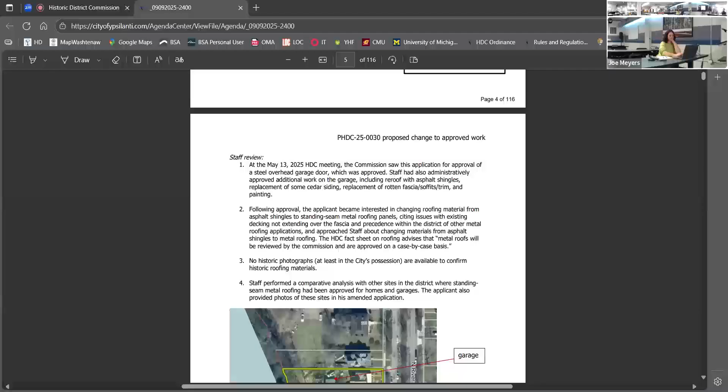There are three other sites in the district that the applicant had brought to my attention. So I did go to those sites and also looked at the records for past approvals, communications, and minutes packets, seeing what the commission and staff had been looking at before in their approvals. There seems to be a variety of factors here. One is that the garage at 217 North River is situated behind the house so that you can't see it - it is out of view from the public right of way.

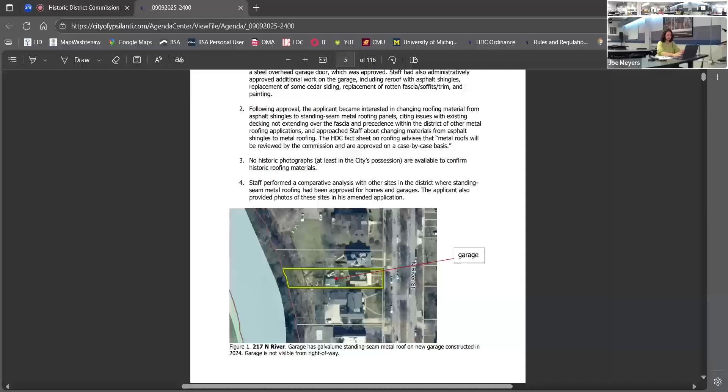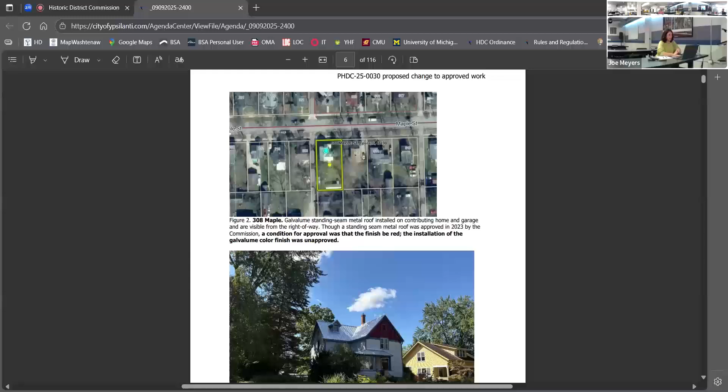The next one is 308 Maple, and that is the home where the entire house and the garage were both approved for standing seam metal roof. However, a condition was that the roof would be red in color, and what was installed was actually not red. So I think that's an important note.

Specifically because the literature shows it is a historically appropriate product in some instances, however color is a factor in what could be considered appropriate, perhaps more than other roofing materials, because of its reflective quality and how it takes up more visual space or calls more attention depending on what color you install. So where typically the commission would not oversee color, this might be one instance where it does actually impact the visual quality once it's installed. In my experience walking the street, you can't really see it in the photo, but it was glaring - and I could be wrong, but I think a darker, more toned down color might have changed that. That was what caught my eye going down that street.

Now, I understand the garage placement - it's a front gable configuration and set back, so it's not going to be glaring or very obvious from the right of way. However, the real question is, both the home and garage are visible and contributing, according to the recent resurvey.

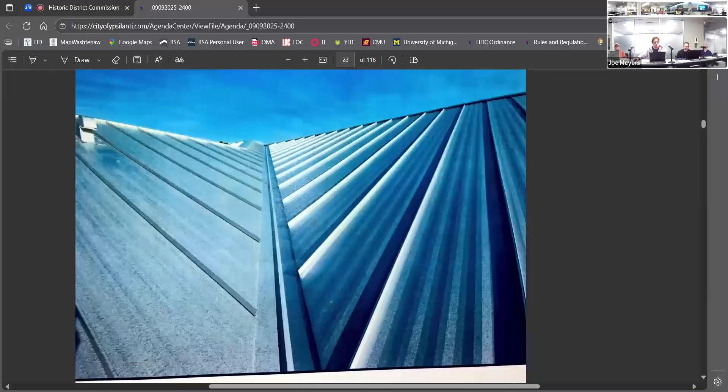It's a zinc coated steel. Sorry, I've specified the product. It's zinc coated steel. The color is a result of the processing materials. What you're looking at, Stefan, are painted products. But in any case, all of them come with a certain degree of gloss to them, because we don't make flat steel roofs or flat aluminum roofs, flat as in paint finish. You can't buy them, as far as I know.

Okay, but the manufacturers of this product offer it in this galvalume finish as well as an array of colors, do they not? I'm not certain, but if you're looking at the website, I know they have some other colors, I just didn't research beyond this one.

I do remember the application for the house, the other house on Maple, and I don't remember that it was particularly contentious in terms of the metal roof, the standing seam metal roof. I do remember that the commission did discuss the color because it's this big uninterrupted area that's highly visible. But that brings me to where my discomfort comes in, saying, well, it will match the house across the street. The problem is the house across the street was not approved for that color. It's, in a word, illegal.

Well, I think the one across the street, for the garage, was approved for the galvalume. That wasn't the red. I think it's the one down the street more that was supposed to be the red. But that's what I was saying, maybe not that house, but one of the houses that's sort of cited as precedent really has no precedential value because that's not what was approved. What was it, which one is that? Is it 308 Maple, is that one? Because that was the whole roof.

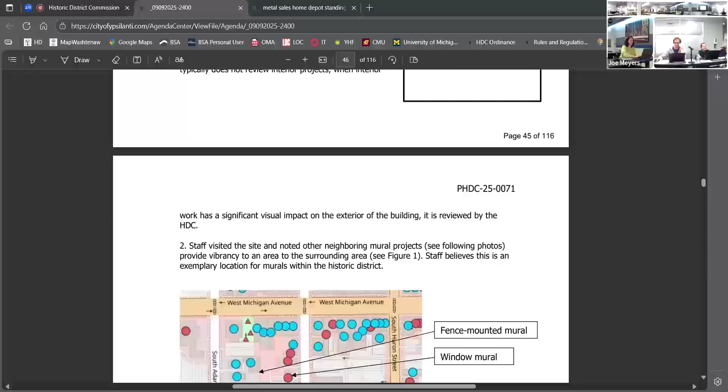It's an area that, in staff's opinion, is a kind of pocket within the district that doesn't have a lot of contributing structures around it, but there is seasonally a lot of activity. My recommendation is that the murals do not have any negative effect on contributing structures, as they are - here, you can see the location. The red are non-contributing structures, and then the blue around it are contributing structures.

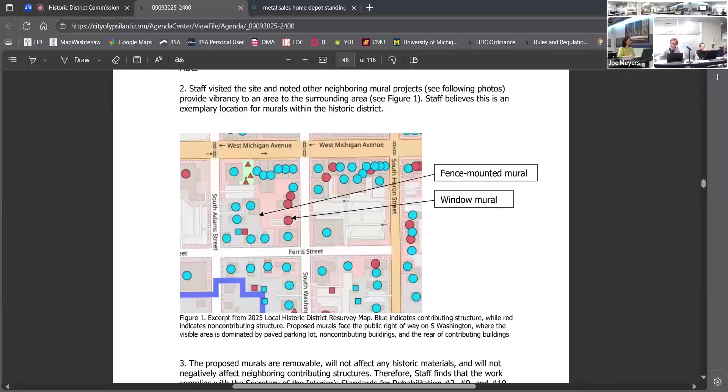But like I said before, the murals would be facing South Washington, and in staff's opinion, adding vibrancy to that area of the district, and not negatively impacting anything contributing. So my recommendation would be to approve the application as presented. Okay, thank you. I don't have anything particular to add here. Commissioner, thoughts, comments, motion?

I agree 100% with staff's view, especially since it's removable. It's not going to damage anything.

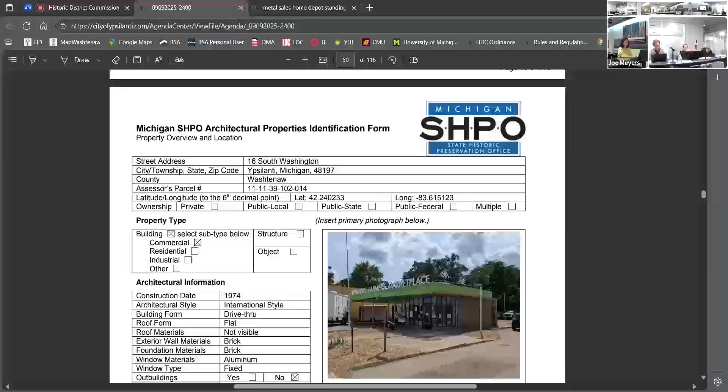I would be prepared to make a motion. I therefore move to approve application PHDC-25-0071 and issue a certificate of appropriateness for hand-painted window and fence-mounted murals at 16 South Washington as described in the application. The proposed work meets the Secretary of the Interior standards for rehabilitation. Number 2, do not destroy original character. Do not remove or alter historic materials or features. Number 9, contemporary design shall be compatible and shall not destroy significant original material. And number 10, new work shall be removable.

So moved. Second. Can I ask for discussion? You may.

I agree with everything that's been said in terms of it being removable and all of those things, except that in this particular case, the specifics of the artwork include the company running the place's logo. And I think that transforms it from a work of art to a sign. I don't want, as one commissioner, to set a precedent for the Bank of Ann Arbor to be, quote, making art with their logo embedded in it and painting it on the sides of buildings. So I can't support the actual graphic.

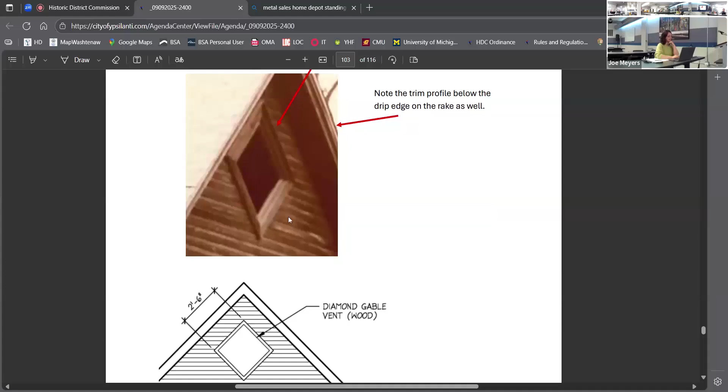It didn't seem to staff that the historical photographs that we have available, and the project team has available, were reflected in the provided drawings. For example, the dimensions, profile of trim, the materials in general, but also justifications for why things are designed the way they are.

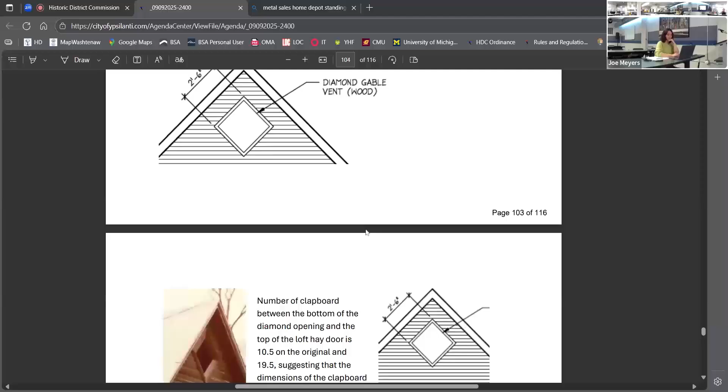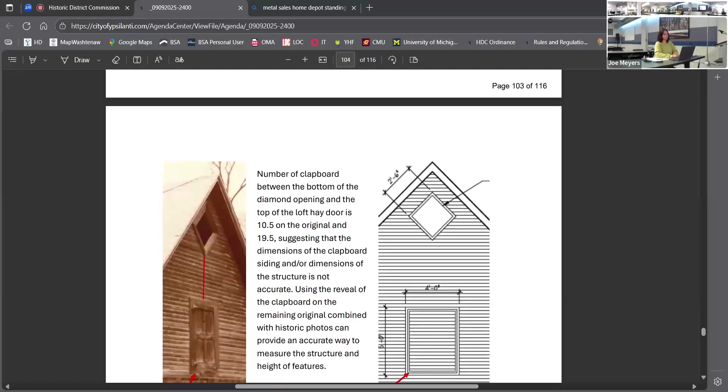There are some remaining materials on the site that, per the standards, will need to be reused in the reconstruction of the carriage house where possible. For example, the clapboard siding that remains will need to be matched in profile, and there's some differences in height, and it's not quite clear what's being proposed for openings.

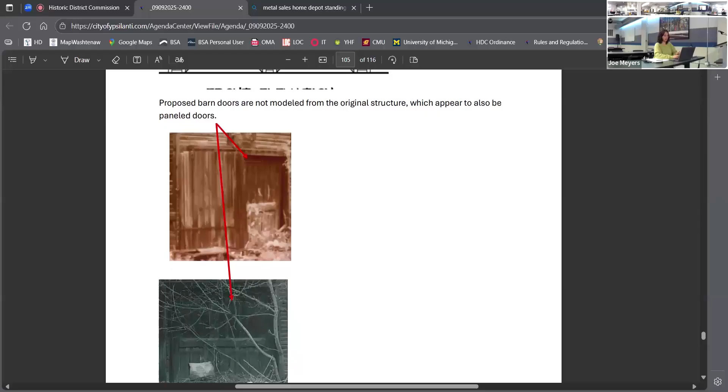So my recommendation was that for the October meeting, before that application deadline comes around, the application materials are reworked and staff is consulted to work through some of those things before the final submittal, just to hopefully have something complete and approvable by the commission.

But I definitely welcome all of your feedback on both my comments and, of course, the materials that were turned in. So if that's all I have, I don't know if Kareem has anything.

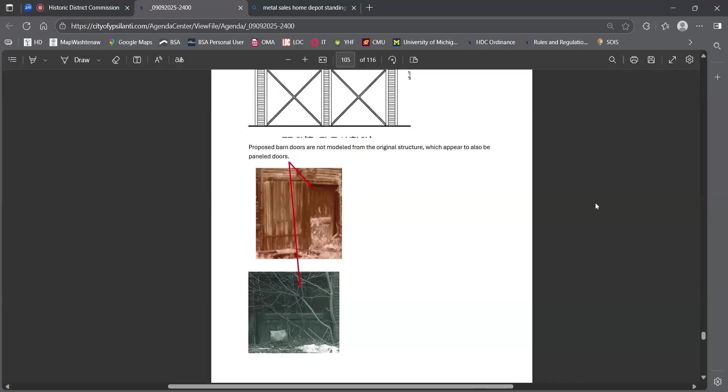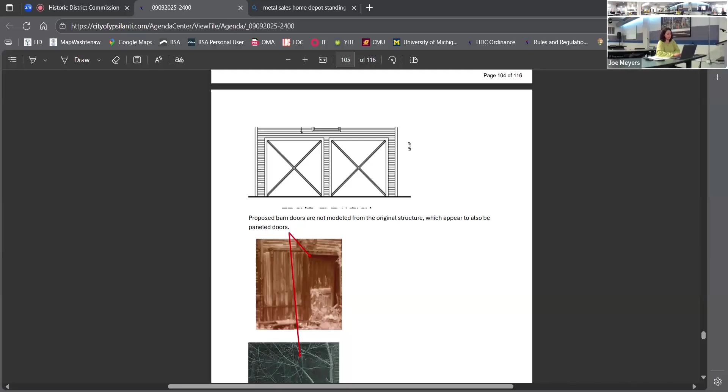So, well, first off, good evening, hello everyone. Is William in the group with us today? I'm not sure if he joined. He said he was planning on joining us. No, he did call me beforehand and said he was not going to be able to join. Oh, even better.

Okay, so right now we are going through a few things with William. We do have a material list, I believe, but we're going a little bit back and forth with him because the pricing just doesn't make sense. It's nearly coming out to six figures for a barn style garage, and we didn't receive a pricing breakdown or anything like that.

So we're going back and forth because some of the materials that were proposed in his application weren't really needed, thus increasing the cost for us. Just as a side note, obviously we want to erect the building to how it was and bring it back to an exceptional standard, but with a lot of things going on, it doesn't make sense for it to be about $83,000 for what he's proposing.

So we're going back and forth right now with him, trying to get a better understanding of what we can do, and what was proposed with him, and what really would just be acceptable with the commission. But that's where we stand as of right now. We're nearly there, but right now we're just talking about material costs.

The materials in the packet, Carrie, you mentioned the submittal of additional materials. Is that included, or is that not in the packet? So the only information I have on materials is included right here. It was what was included on the application itself. And like I mentioned, there's a lot of discrepancy in options.

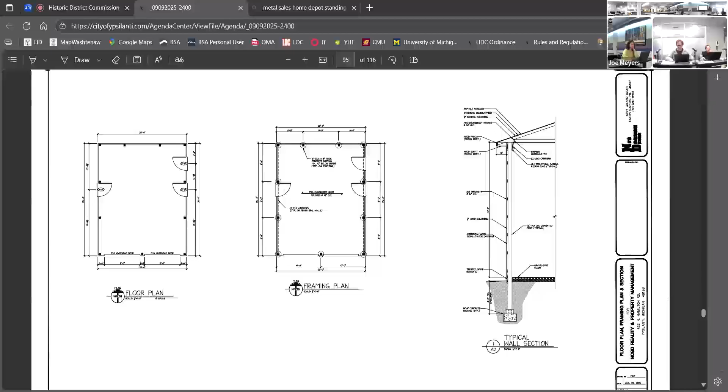Right, okay, so it's not exactly clear yet what's being proposed. Yeah, this is all in a very much, like, if this was slated to be an action item tonight, there's no way this is nowhere near ready for that kind of thing, and I think Kareem knows that. I was trying to pin down those details in advance, but there's a lot more specifics, there's no rush to get to.

I understand the reason to keep things moving along, but to rush to an application where we have to either approve or not approve it, there's no sense doing that until all these details are straightened out. Even material choices, as you said, you're going back and forth on. That would all need to be ironed out before you make an application. Correct.

There's a lot of details here, still a lot of question marks, and I don't know if commissioners feel like they have enough to comment on, or perhaps see something heading in a certain direction and would like to ask a question, or head it off, or encourage something. At this point, I don't know if commissioners see that kind of potential, but I'll open it up to commissioner comment.

Could start as a discussion point, maybe some of the things that Carrie had pointed out in her evaluation. It could be helpful to comment on those. Again, looking for feedback to give to the applicant, to take back to the builder as well, to help focus and narrow down some of these things.

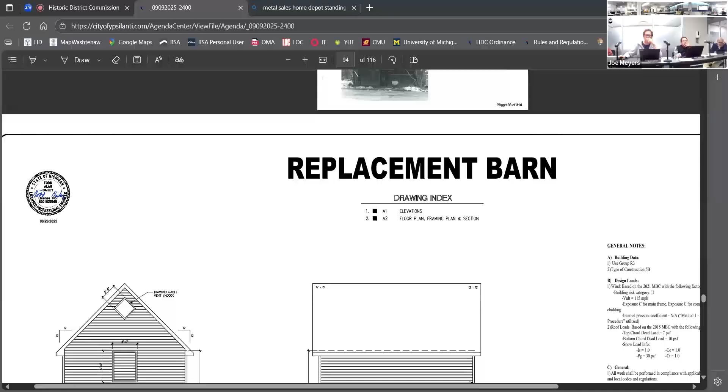The original structure had a second story. Is that being included? With the door above the garage doors accessing the attic area, the second level?

Are you asking the applicant? I'm just wondering, it's not in the plans. Yeah, see, this is why I was requesting William to be a part of this meeting today. I know he's been communicating with you guys on the side, maybe Carrie, but with us he just, last second — sorry guys, I'm accompanied by my partner today, Hiba, by the way.

But Hiba, when did he send it to us? By like Friday, randomly, he sent us the cost, just the whole breakdown. Yeah, he sent us an invoice with no full breakdown of all the materials, everything he was charging us for on Friday. Didn't respond Saturday and Sunday because he's off, and then it was just kind of in the air Monday and Tuesday today.

Yeah, so we've been getting other opinions from other builders, and 10 out of 10 have said it's an outrageous price point. And I guess there was an approved drawing that we were good to go on, but the builder was kind of throwing in some things that weren't really part of it, to say the least. So that's where we're at.

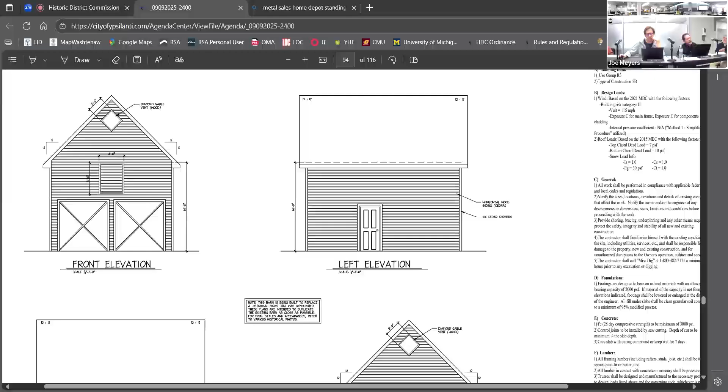Have you seen any of the feedback Carrie provided that's in the packet for this meeting tonight? Yeah, we've been looking at it. We would glance at it, but William would tell us to just let him handle it, so we've been letting him do so. But this past Thursday, Friday, whatever it was, that's what kind of took us by surprise.

Stefan, to possibly answer your question, if you look at drawing 1 on A2, the section through the wall does not include a second story, so I would say they're not proposing a second story. But what they are proposing are 3 doors on the outside that are not, quote, overhead doors. I don't understand why they're there, and it's certainly not the look that it had before.

And it kind of makes it look like it's going to be operated as a duplex, which might be the wrong message. So yes, I'm glad you mentioned that, because it's looking like it's going to be operated as a duplex according to what we're hearing and the materials and whatnot. We just want to bring it back up to a standard historical barn-looking garage, barn style I should say. But that's why it's drawing up some confusion on our end, because it just didn't seem like that was the correct proposal.

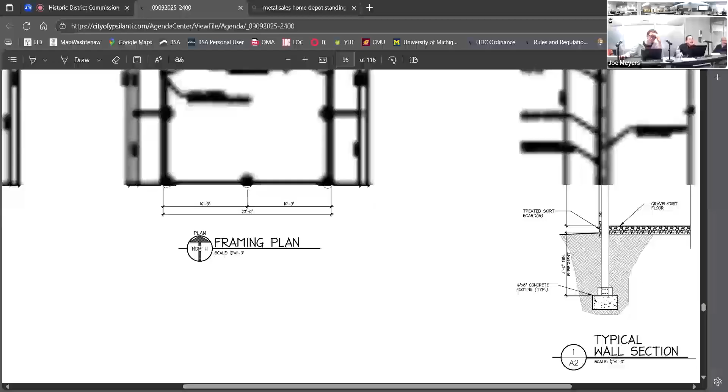Is the building going to be insulated? It's not called out. Insulated, I'm not entirely sure — just however it was from before is how we plan on bringing it back.

And also for the commission, if there's any notes I can take down, maybe any feedback from the builder that I can take note of so I can pass it along. Again, wishing he was here. But if there's anything we can take note of to pass along, especially with this duplex style that he's kind of proposing, I would definitely love to take note of that.

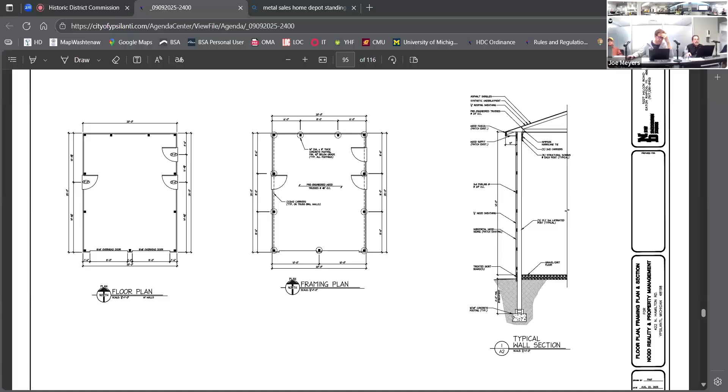Well, commissioners, I would say that you should definitely take back these notes from staff, from Carrie that she made. I think those will all seem relevant in some way to the design and to the final product. Just have thoughts about adjusting or adding to that at least.

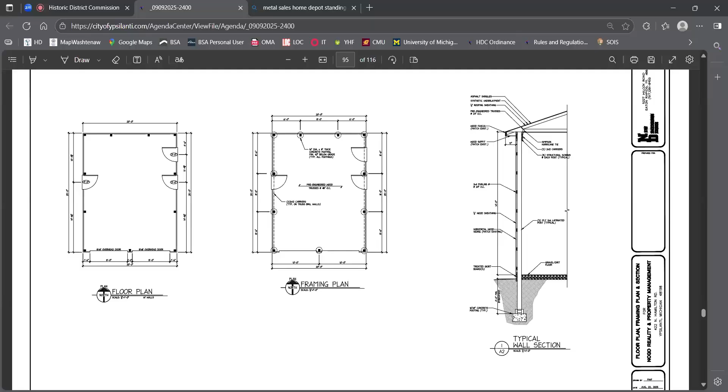If I may, I just want to clarify, because I sent the comments that I've compiled, I sent most of the same comments to them about a week earlier, but I did adjust a couple things before posting the packet. So I can, Kareem, resend the updated comments to you all again. A couple additions I added. Yes please, Carrie, can I ask you a question?

Am I to understand that you expect them to be reusing the old materials in the new structure? Yes, so just for reconstructions specifically, any remaining materials should be integrated as part of the structure. Do we have an inventory of what that is? So we have documentation, but in my meeting with the architects and builders over a month ago...

I apologize, I don't mean to cut anybody off. I think you guys froze from our end.

I don't know if you carefully removed, stored, and then reinstalled. Comments was that plan needs to be included in the application, but also it wasn't called out, like what area of the reconstructed carriage house would be. I think, in my opinion, the most public facing, the most visible part of the structure should have those materials, or exactly where they were before. That would make the most sense, but none of that was included in the application, and that will need to be included. And my other concern with the original materials is that if things do draw out, they will need to be protected. I understand they are exterior materials, however, ice and water is going to get behind that. So I think my concern would be documenting and removing and storing, marking those items soon, because very quickly we could see deterioration on those original materials.

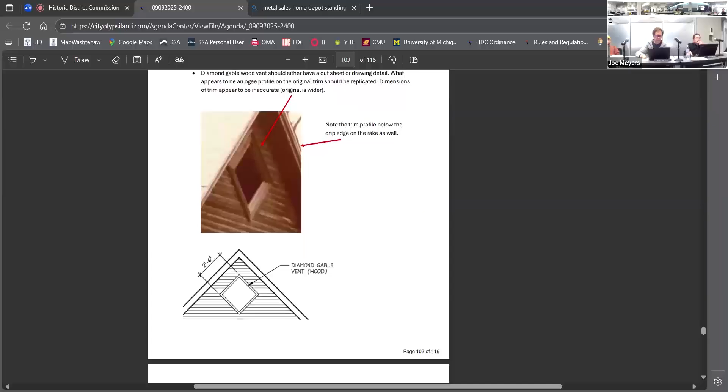For me, I just saw a lot of things here. I didn't have anything particular to add. It just, I feel like with the...

Then evaluate, but if it was heading in a particular direction, I think we can nudge it that way now, or nudge it in a way that keeps it on rails.

I feel like we need to see something a little more concrete before we can really weigh in on anything. I think the ball is sufficiently in their court. I think that's right, and I would like to commend the owners for their, what appears to be a good faith effort to move this along in the right way. Yeah, agreed. I think that's necessary to keep this all rolling.

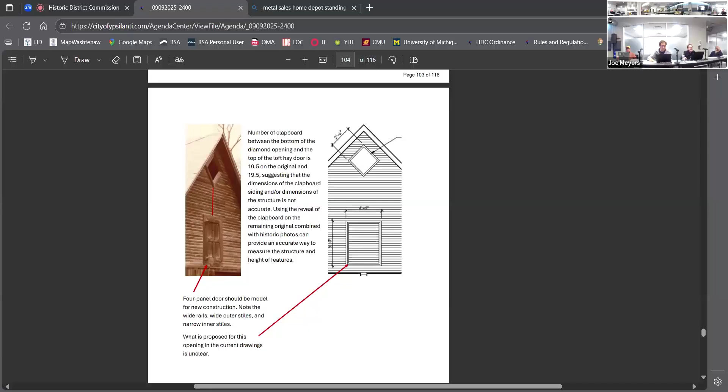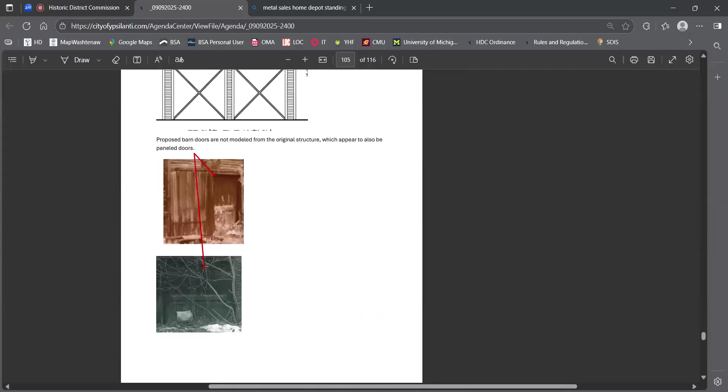Thank you for that. Well, thank you for you guys recognizing that we are attempting our best to get this situated. Obviously I want it to be back to the way it was. But I guess I do have a question for the commission.

I suppose I want to ask, does it necessarily have to be a barn style? Is there nothing else that we can erect over there, or make it like a little sitting area, or a pond, or nothing at all? It has to be strictly a barn style garage?

On that footprint, a structure that looks an awful lot like the structure that was there is what goes there. If there's something else you want to do in addition to that, that's fine.

Right, but it's demolished. Unfortunately, at this point, we would even be more than happy to just level it out, make it a little pretty area for my tenants to maybe lounge around, sit around, and make it more attractive in that alleyway.

I'm just trying to take on a little bit more, because I don't know, I just don't really see it just being a barn, maybe a little bit more, but I understand it is a historic district. Just trying to see if there's anything else that can possibly be done to make it a little bit prettier.

If it hadn't been illegally torn down, it would still be there, and we wouldn't be having this conversation at all. You would have a barn.

I understand. If the previous sellers were maybe pushed a little bit more, maybe it could have been solved that way. We were misinformed a lot from the beginning, and they even gave us some sort of receipt stating that this cost $5,000 to demolish, which I still have from the seller and can send. We were just misled in many ways.

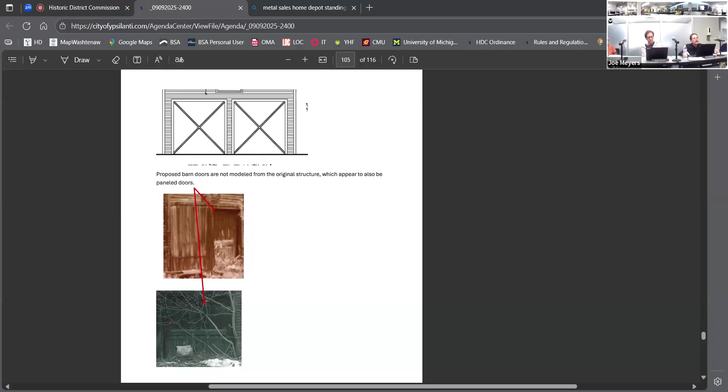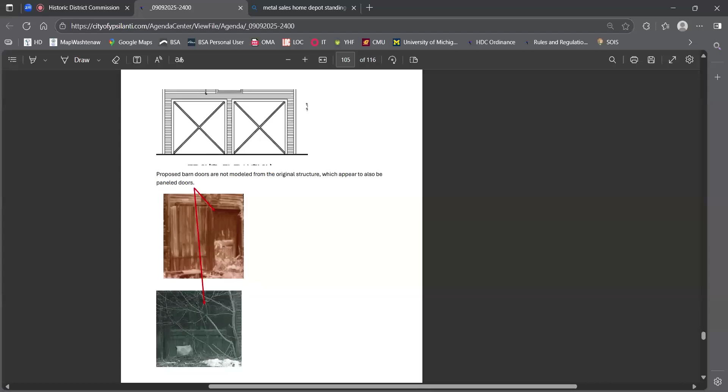Okay, now I just have one side question as well. So assuming that we were to erect a new building, correct? Now I understand the displays, and I'm looking at the screen right now where the front of the barn has like two entrances. I'm not sure if they were slide doors at the time. Now let's just say we dumb it down a little bit. Perhaps if we made it smaller with one slide door, minimizing the cost, minimizing the material, but still paying some sort of homage to the historical building that it once was.

And again, I sincerely apologize that we are here today even having this conversation. I wish it was a different conversation, but here we are. Now if we were to propose something that were maybe like one slide door and maybe a little bit smaller, but still having that same diamond window at the top and perhaps that same arc for the roof, just making it a little bit smaller, is that something that we could potentially try to propose?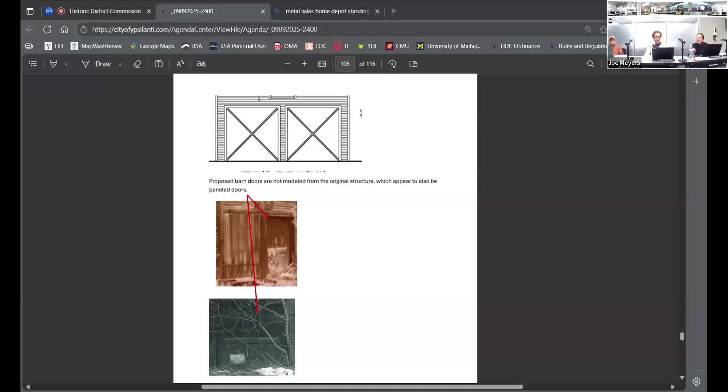Well, again, I would say that if you think you can tell a story with a design that is something other than mimics exactly what was there, then you should feel free to do that. I can't tell you, we're not going to design it for you. I think this is exactly where you need a professional designer to help do this, to help tell this story, to help this design meet the criteria, and this is why. That's what they get paid for.

Okay, well we'll definitely sleep on it and come up with a different proposal in case, some sort of memorial of some sort to it as well. But we'll definitely keep you guys in the loop on that, Carrie, especially you. And again, I'm sorry that the builder wasn't here today. That was a big part of it, but, yeah.

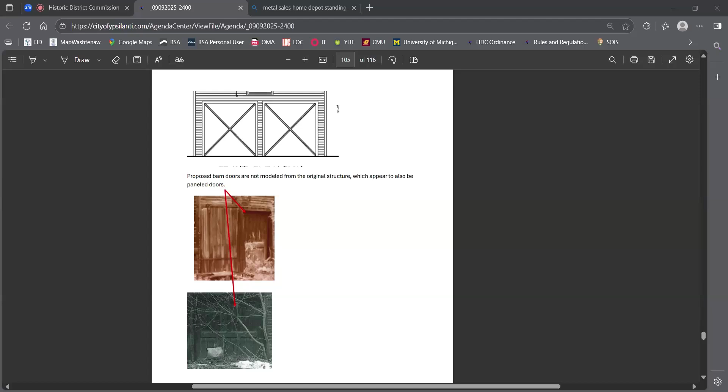I'll be getting back with you on that. Yeah, we're probably not making as much progress tonight as you would have liked, because of his absence. Yeah, I was hoping for a whole different conversation today, but I'm just happy that we get to have this today at least. I think we're doing something here, we're not doing nothing.

And I think just discussing some of these thoughts or some of the things that you've got in mind is helpful. And, like I said, I think other things could be possible, but you would need to show why any alternate would be appropriate. Okay, that makes sense, that makes sense.

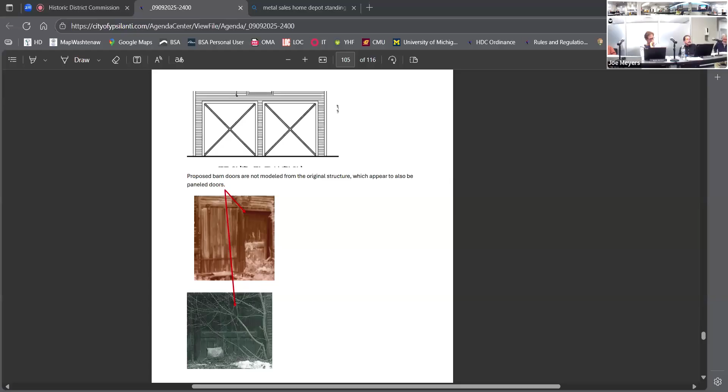Yes, can I say, I also have one last thing. With the caveat that without seeing something in front of me, an actual proposal or a plan, I can't say oh yes this would be fine, or yes this. But in the very abstract, would I at least entertain the thought of a single sliding door instead of two sliding doors? Yes, I would not reject that out of hand. That doesn't mean I would vote for it if it's presented and I see it. And we look at the standards and we look at the rules on demolition and what has to be recreated. I get all that, but that would be my thought there.

And I think that ties in with what the chair just said. I think we're certainly not going to tell you absolutely positively you cannot present some proposals. Present away, and we will try to apply the ordinance as best we can. I appreciate that sincerely.

So just to put a visual on it, I gave Carrie an image of one of the two structures in Philadelphia.

That's what they did too. Was Philadelphia another property in Ypsilanti that was a similar story? This is the city of Philadelphia. Oh, I thought you were talking about the neighborhood of Philadelphia. Never mind, it's the Philadelphia neighborhood of Ipsy. Anyway, Gabriel's cheesesteak just popped into my head. All right, well, thanks for the visual.

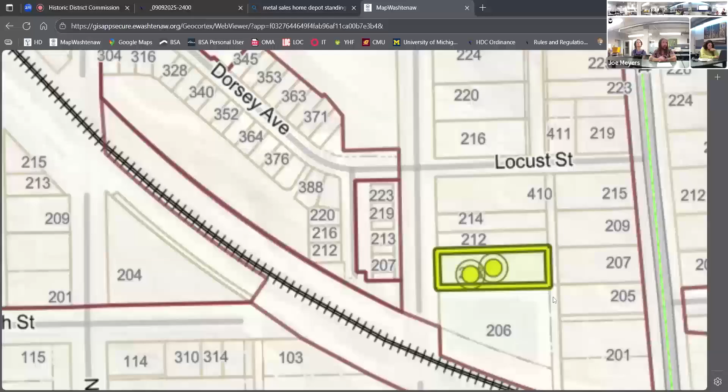So behind our house, at the very back of our lot, is an access alley, but it is not a through alley. It stops right at the DPW lot where there's a fence back there. And then the adjacent property to the back of our property is a big apartment building, which is not in, we're actually the very last house in the HDC, in that corner there. I think it's 207 and 205, or it might be all three of those lots.

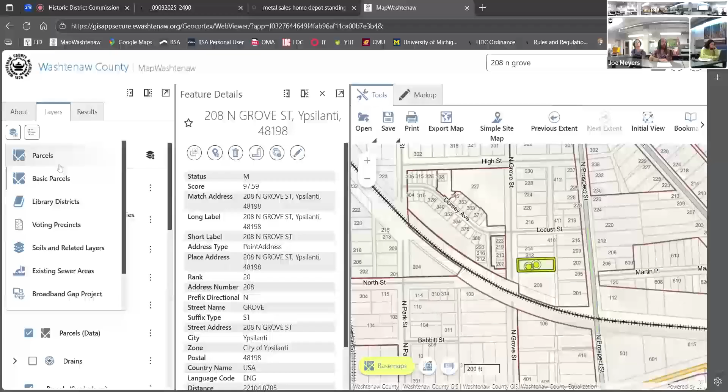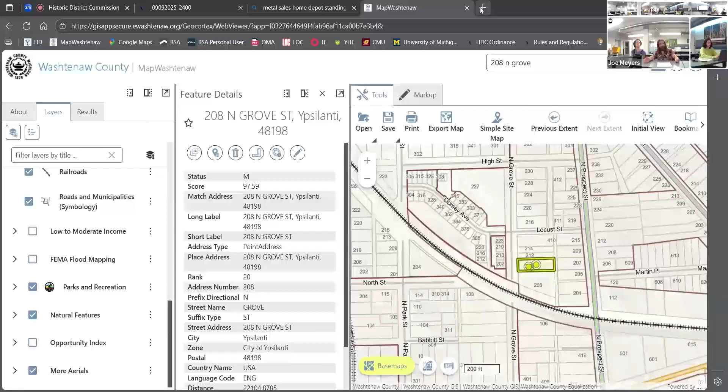So we only have folks next to us on 212, and we have a double-sized lot. So it would be on the very back corner, 3 feet from our back property line from the DPW lot. And then Josh said that we could be 1 foot from the alley, which would be pretty rad.

We would like to build it in the neighborhood of 20 by 30. It would be single story, no plumbing, insulated, heated and cooled with, I believe, a mini split heat pump. Single, maybe a double wide garage door and a man door. It would have power, but no plumbing, no gas.

We talked with Carrie about the outward style of the structure, that it would match the house, that we would match the architecture of the area as well. We would have the coloring and the architecture of the structure to match the house.

She did state that there is a historic document that says there used to be a 10 by 17 building in the back of the property, but there are no pictures or anything like that. So that is of note that there was a structure there, but that wouldn't meet our needs. We would like to have a larger structure than that. Is it in a similar location to where that was? Not certain.

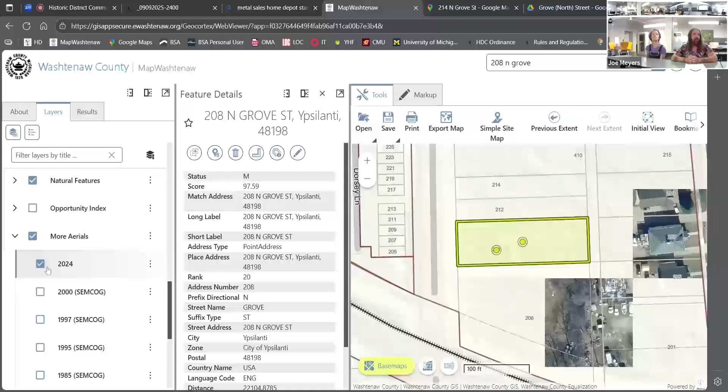We wouldn't need to add a driveway or anything to the property, as we'd be accessing from the alleyway. That's what Jeff was saying, that could be our access. So that alleyway is active? Yes, it's an active alley, that's how you would access it. It has not been—what's the term? I don't know, I would say privatized, but that's not the right word. Vacated—it's not been vacated, correct.

So I would say that, given it's a brand new building, and you heard my comments regarding fake architecture, I think siting it in the historically appropriate place, which is by the alley, would be important. If you start to second guess that, you'd start to lose me, because I prefer it to be sited close to the alley—it makes more sense, and it's also the pattern of the way yards work in that area. The outbuildings are located close to the alley, and I just think it makes sense for a lot of reasons.

And the only other thing I would comment on is that 16 or 18 foot wide overhead doors only existed in the 21st century, so they're really the wrong scale in a way. If you could accommodate a pair of overhead doors instead, it's a better scale for a building of that size. How about if I built some wooden doors that swung open—would that be acceptable? That'd be very cool. I mean, I think I'll do that. If you're up for that, I'm up for that.

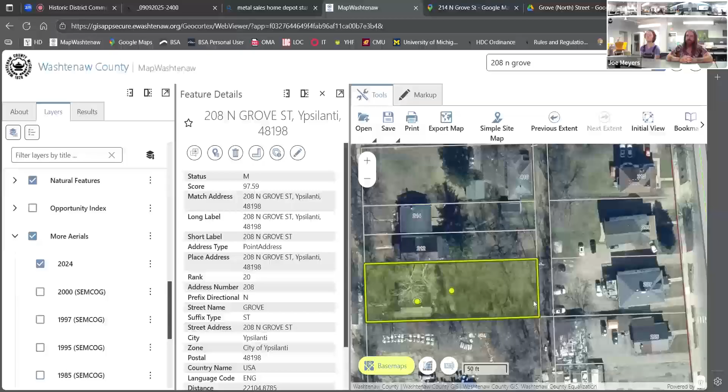So, I can complain about the fake architecture, but at the same time, the new impositions need to keep the appropriate scale of the neighborhood. I think to me, that's being part of the continuum of a historic place. That's not fake. Scale is just scale.

Yeah, absolutely. You could argue for our particular home, what is fake or historic or whatever, because I'm pretty certain ours was ordered out of a Sears catalog. So there's history there too, we could probably find all sorts of precedent in Sears catalogs for things available in 1920. The city's got a lot of Sears houses, all up and down the railroad. They sold those kit buildings, and all of our rafters are 2x4s, so I'm pretty sure it's one.

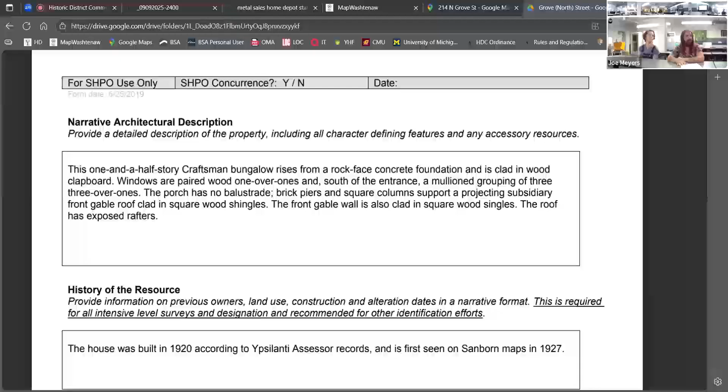It should be stamped if you've ever seen them. Do you have access to any of those, like in the basement, can you see? I haven't, no. If it is a kit house, they would be serial numbered, or have some sort of identifier, so you know which piece goes where.

I had seen them near the ends of joists, but I don't know exactly where you'd necessarily see them. Our joist situation is weird because they have fake rafter tails on them, so we have our regular rafters and then the rafter tails. Either way, I haven't looked around too much in the basement for the joists. We also have joists for the second story that we had to bolster quite a bit.

So, material-wise, I think you've got some options. If you want to come up with some things, I'd suggest another study item once you've started massing the thing out or have an idea of what this could look like, and then start picking your materials.

We want to know what they all are. Not that we'd have tons to say about each and every one of them, but we want to know what material you're using, what you're using for this and for that, if you're going to have any exterior lighting, that kind of thing. Many of these things aren't super specific requirements. Sometimes they are, but mostly you just need to know what they are.

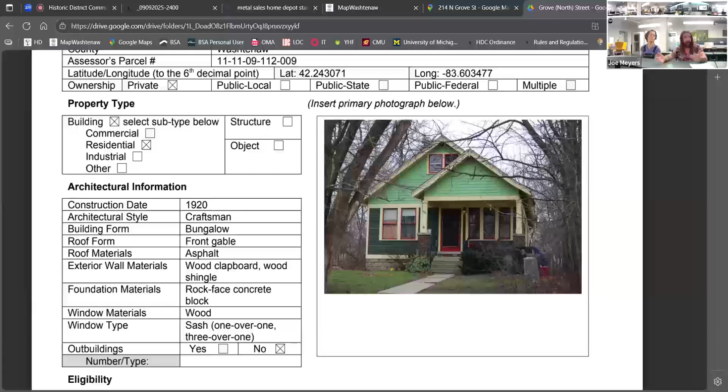Gotcha. I've been planning our garage for quite a bit. I didn't bring things to present to you, but I have a pretty good idea - there aren't too many options for things that will match the profile of the house, it's either cedar or engineered wood. Asphalt - we've got a pretty good idea of the roof stuff.

So yeah, we were just wondering about that. Honestly, that was one of the two things I really was wondering about - is an alternative material to cedar okay with y'all on the outside, and is the size of the structure okay, because I'm not going to plan this building without knowing if my size is even going to be approved.

I've got a pretty solid handle on that, but because of historical precedent, I didn't know what size outbuildings would be acceptable or not. What is the footprint of the house, Joe, roughly? It's 33 by 24, something. This is the old property card, 32 by 24, with an 8 by 16 front porch. I think zoning says our outbuilding can't exceed the footprint of our house.

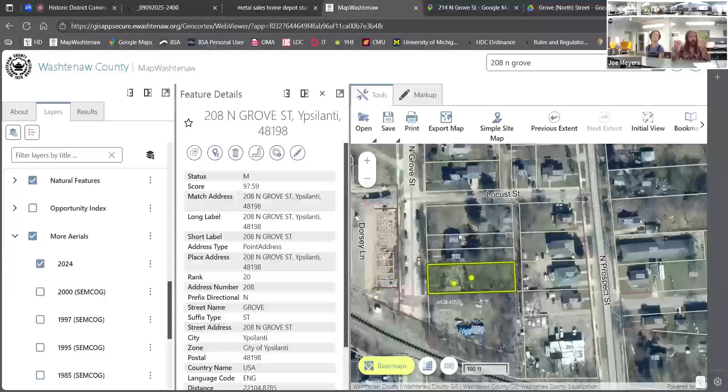I'll also note that we're directly across the street from that brand new housing development that's happening. I don't know if that would have any weight in your decision, but we're in between a brand new housing complex, and on the other side we're at the very end of the HDC district, and then there's the DPW lot.

So being in the southwest corner, you better make it look good. Yeah, that's right, we're representing the whole community — the train comes by, they're gonna see that and say, well, historic, it's looking pretty good. I reckon I've spent 1,000 hours in there since we bought it 4 months ago. So we're quite happy with the work we've done, and it needed it. Oh, yeah.

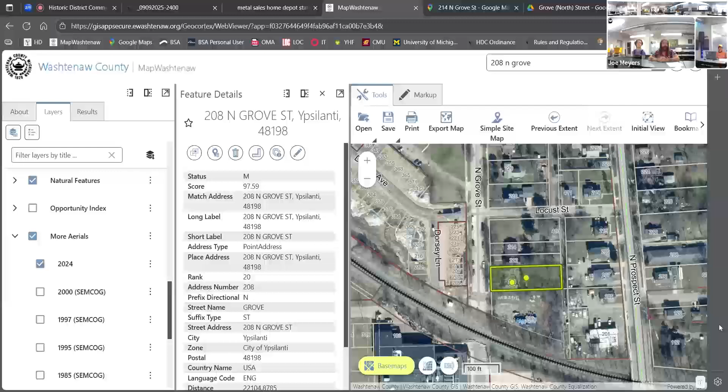If there was concern about putting too much work into something without a clear message on whether we'd approve it or not, I think it would help to simply show some of the things you already have — the entire property and plan of the various pieces, and some sort of perspective to give a sense of the massing of the several structures. That would be a helpful tool going forward, and I don't think it would cost too much on your part, given the information you've already gathered.

If I may, I would say too, you've already been talking with me for this and other projects, but I can give you some feedback based on the standards the commission will be looking at. So before you turn in the application, I can give you feedback and work with you to hopefully get it to an approvable point. If there was an obvious concern with massing, I wouldn't get to make that decision, but I could point you to the standards the commission will be using.

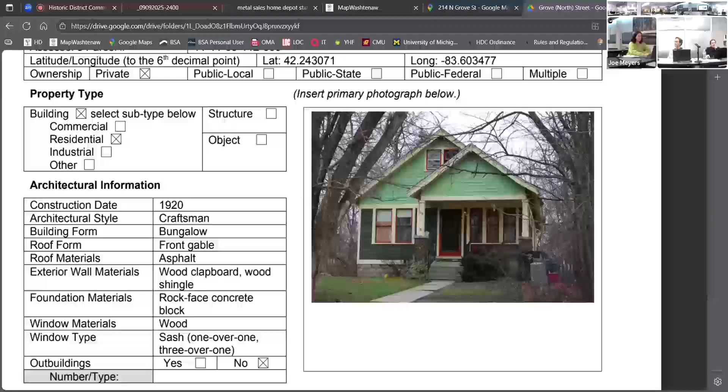Okey dokey. Yeah, so it sounds pretty reasonably straightforward to me, but is there anything else while you're here? I don't think so. Okay, again, if something comes up, here's help.

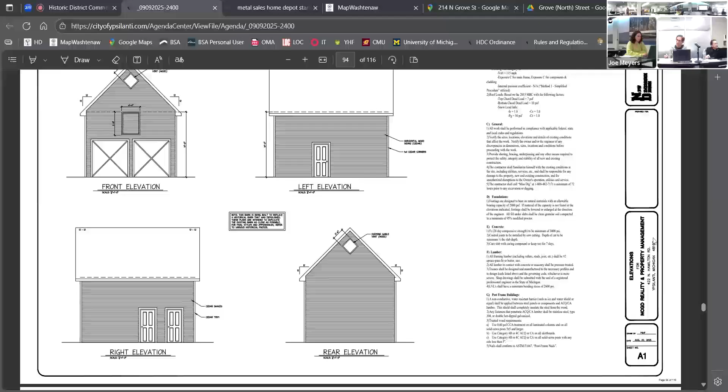All right, so on the agenda here next, I see you've listed off a bunch of administrative rules that you've been working on. Is there something you wanted to share in general about any of that activity? I had a couple things I wanted to bring up, but just wanted to see if there's anything else you wanted to share first.

That's the phone. I don't have any specific comments, but obviously I'm happy to share specific language of approvals or answer questions. Okay.

Well, one thing that occurred to me as I was scanning through them, and again this may or may not apply, it may not have been your approvals—but I see a couple examples here of radon mitigation system work, and maybe I can't group them together, but I see these two here. Were they just ground-up mitigation systems that need to be installed, or were they repair modifications to existing systems?

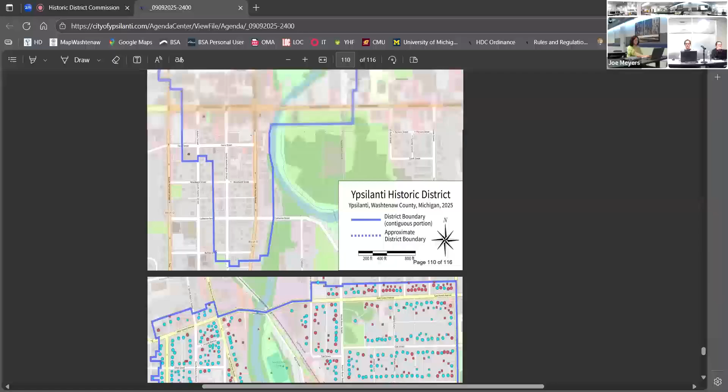The included maps in the district, are those new ones on the website too, the historic district outlines and stuff like that? So, they are not yet.

Part of that is because this is one of the things that could potentially change with the districts, and one of the consultant's recommendations is clarifying boundaries. I have not gone through the entire border to check for potential issues, like uploading something and then someone saying our house isn't actually in the district. I want to make sure all the resources are still included and there are no weird areas, and if there are issues, I want our attorney to look at them before I upload this.

I could see it potentially being an issue, for example, some properties where the line cuts through and it's unclear where it actually is. Yeah, I feel like the line was always like that, even on the one that's on the website, kind of going through the backyard. So I wanted to take a good look at it before I update that map. I think it's much better than our current map, but I still want to make sure there are no issues.

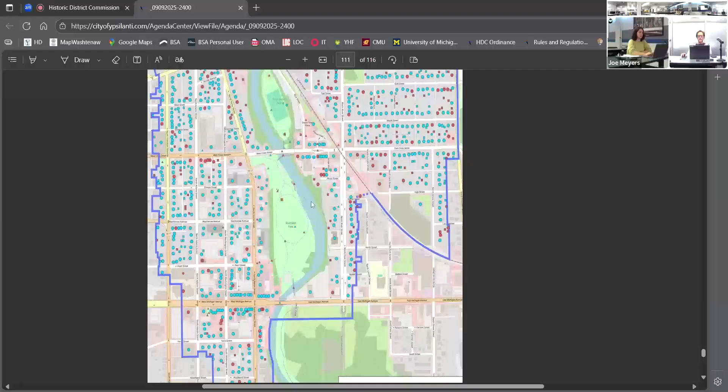What's really helpful is the second map, which shows contributing and non-contributing resources. That's been very helpful, that's a new one.

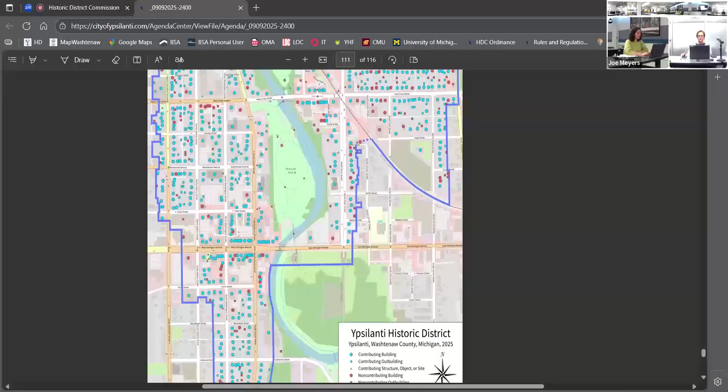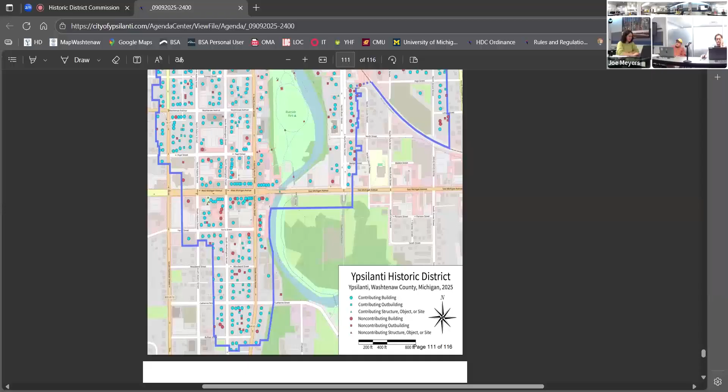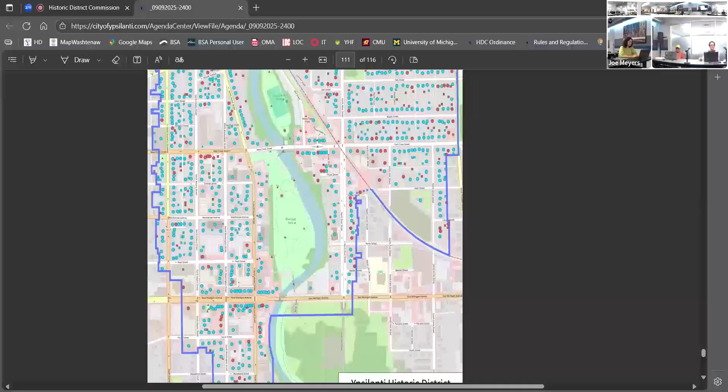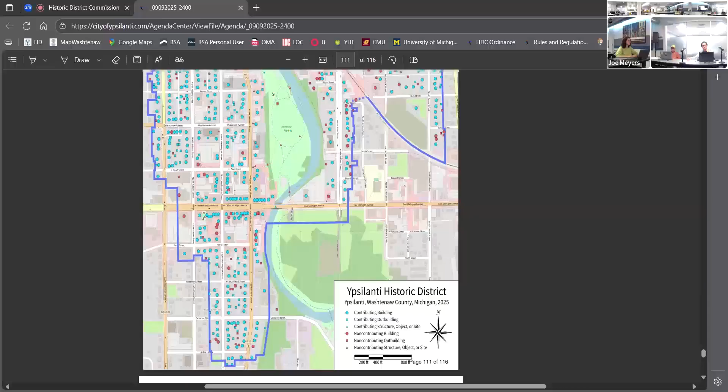Just so you know, the perimeter is 4 miles, exactly 4 miles. Were you walking through everybody's backyard or what? No, if you go on the sidewalks, on the same side. I think it's 4. Commissioner comments? Do commissioners have anything else they've got to get out? 5.9 kilometers, starting on Forest Street, whatever that is. So, close to 4 miles.

All right, let's flip over then to public comment. Is there any public left? There's no. That's not to say we're not a public meeting, but we're just not.

We've got some draft minutes. Motion to approve the minutes. Second. All in favor, say aye. Aye. Approved, motion carries.